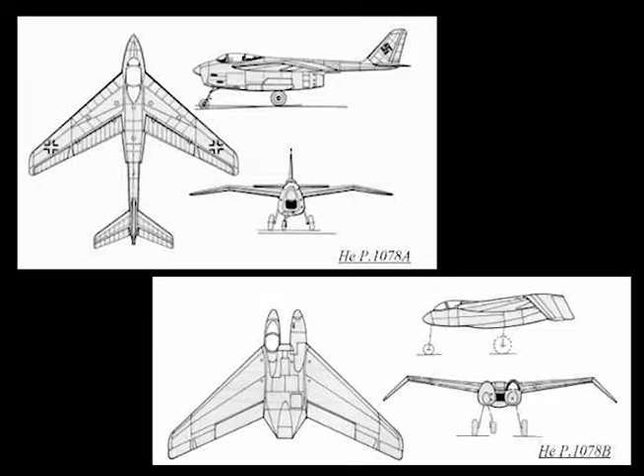Heinkel P-1078 single-jet fighter. Two versions of this single-seat, single-jet fighter are described in Heinkel documents. A third solution was also planned.

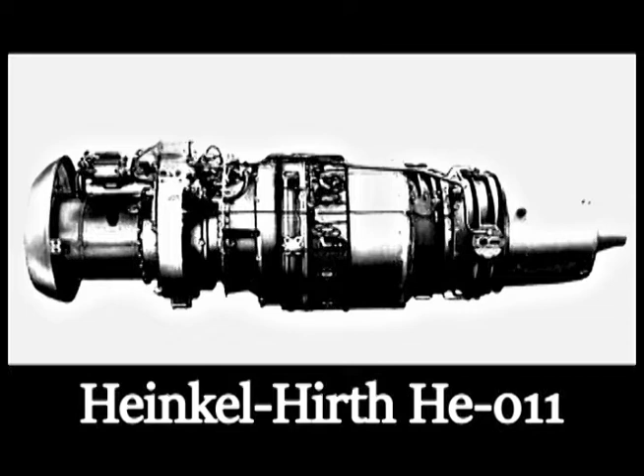The 1078A has a 40 degrees swept-back shoulder, gull wing, and swept-back fin and tailplane. The HES-011 unit is mounted in the lower portion of the fuselage and is connected to the single-jet intake in the nose by a slightly curved duct, 8 feet 10 inches long. Above the intake and well forward in the nose is the pilot's cockpit. There are two Mk-108 guns, one on each side of the cockpit, with provision for automatic triggering.

The main undercarriage wheels retract forward and upward into the fuselage. The nose wheel, which is offset, retracts rearward and upward into the starboard side of the intake duct. There is a large fuel tank extending across the fuselage into each wing root, and a smaller separate tank farther back in the upper portion of the fuselage.

Much less conventional is the 1078B. This is a tailless design with 40 degrees swept-back high wing. There are no vertical control surfaces, but the wingtips have a pronounced anhedral, and controls are provided both on the main wing and the drooping tips.

The fuselage is short and wide, with twin projecting noses. In the port nose is the pilot's cockpit. The starboard nose houses the armament, two Mk-108s, and the retracted offset nose wheel. Automatic triggering is again provided. The main wheels retract forward and upward.

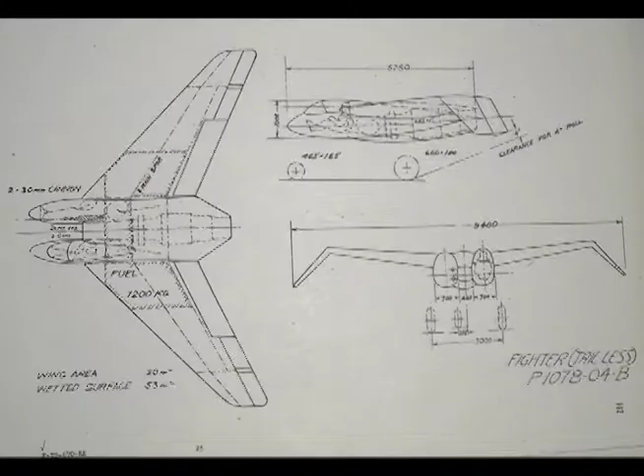Centrally disposed between the projecting noses is the intake for the HES-011 unit, which is mounted in the rear of the fuselage. A single large fuel tank extends across the upper portion of the fuselage into both wing roots.

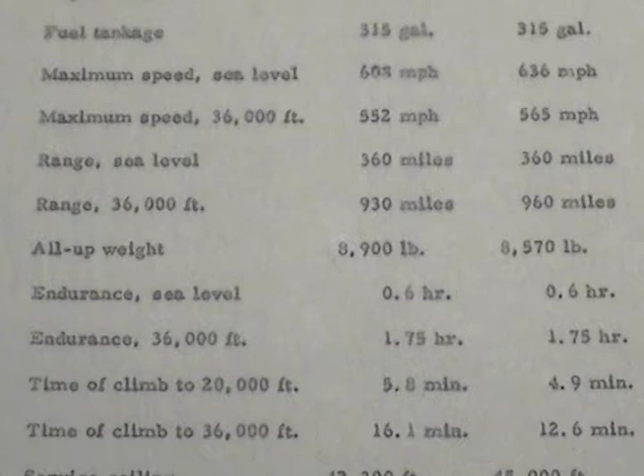Submitted for the single-jet fighter competition is a true tailless type, with a pronounced inverted gull wing, which contains the whole of the fuel supply, 320 gallons. The air intake is in the nose of the fuselage, and is flattened to provide space for the pilot's cockpit above and the retracted nose wheel below.

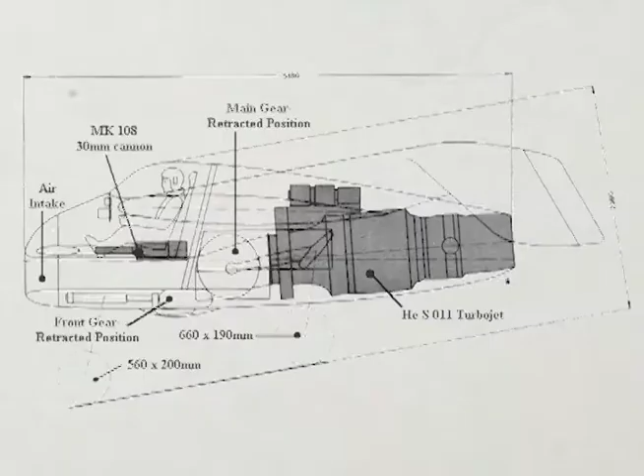Two Mk-108s, 100 rounds per gun, are mounted on each side of the cockpit. The rear of the fuselage is occupied by the HES-011 turbojet unit.

Span 29.54 feet. Wing area 191.6 square feet. Aspect ratio 4.55 to 1.

Takeoff run, 766 yards. Maximum speed, 637 miles per hour at sea level.

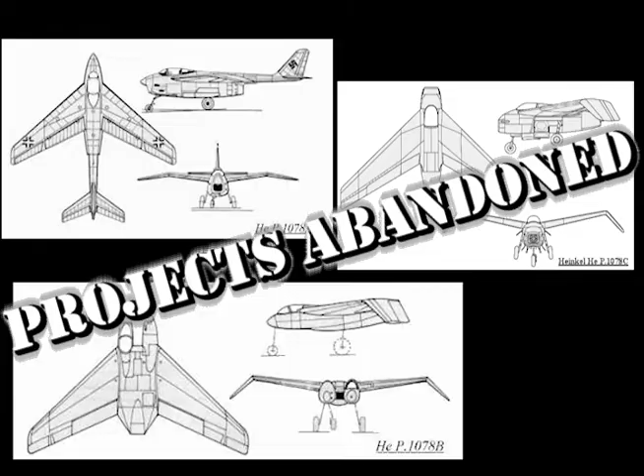Heinkel P-1079 night fighter. This twin-jet two-seat night fighter has the wing swept back 35 degrees at quarter chord and drooping at a small anhedral angle. The conventional vertical fin and tailplane have been replaced by a V-tail.

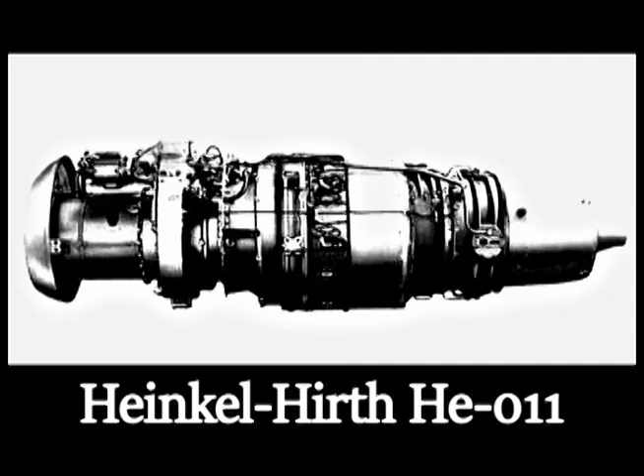The jet units, either two HES-011 or two Jumo-004s, are mounted in the wing roots close to the fuselage, giving a peculiar frontal appearance. Retraction of the main wheels is forward and upward into the fuselage, and the nose wheel retracts rearward and is stowed flat.

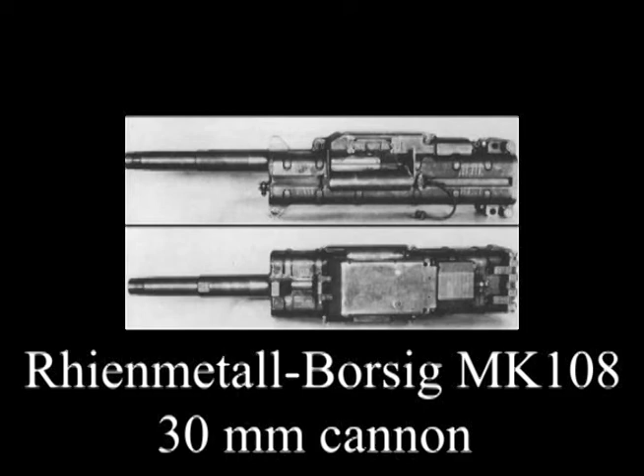The crew sit back to back in a cabin in the nose. 4 Mk-108 guns are mounted in staggered pairs low down on each side of the cabin. There are 3 fuel tanks in the fuselage, and 1 in each wing outboard of the jet unit.

A drawing of this aircraft shows a span of 39.4 feet and a wing area of 323 square feet, whereas a specification sheet gives the span at 45.9 feet and a wing area of 430 square feet. The following weights and performance figures relate to the latter condition.

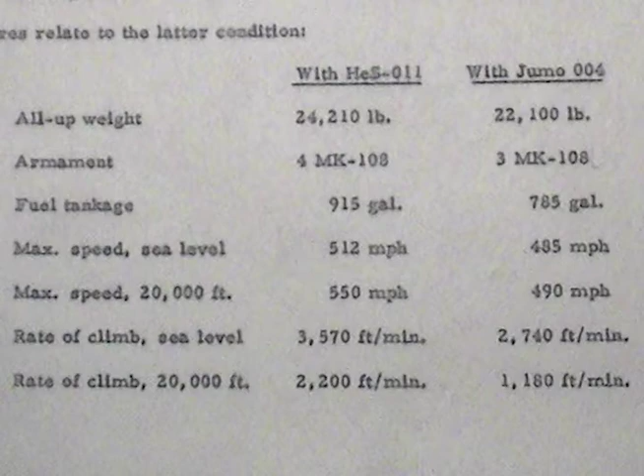There are also other versions of this aircraft designated 1079B. These are both tailless designs. One follows fairly closely on the lines of the aircraft already described, but the rear portion of the fuselage and V-tail have been eliminated and a single fin and rudder substituted.

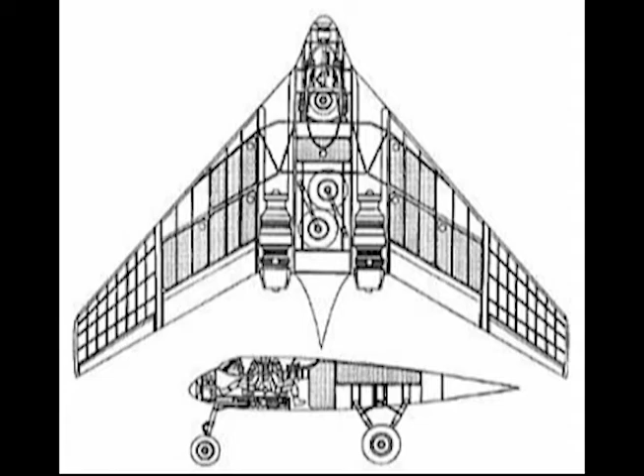The nose has also been shortened and modified to provide staggered seating. The other version of the 1079B approximates more closely a true flying wing design. The vertical fin has been eliminated, and the gull wing has pronounced anhedral on the outer panels.

The jet units are more widely spaced, and the main wheels are stowed flat between them, one retracting upward and forward, and the other upward and rearward.

Heinkel P-1080 Athodyd propelled fighter. This was the latest of the Heinkel projects on which information had been received. It is a single-seat fighter with an athodyd unit in each wing root.

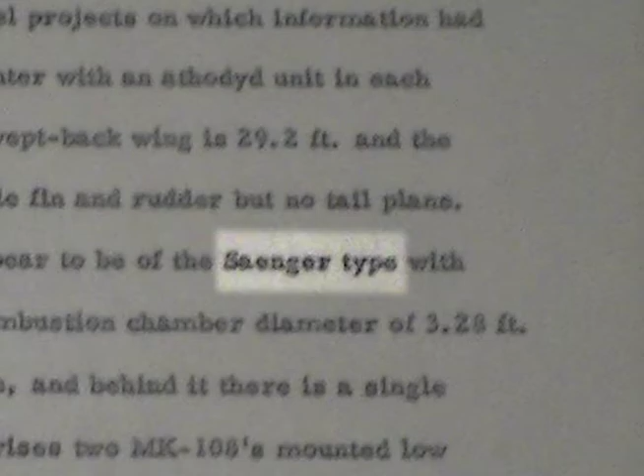The span of the sharply swept-back wing is 29.2 feet, and the wing area is 218 square feet. There is a single fin and rudder, but no tailplane. From a drawing, the athodyd units appear to be of the Saenger type, with an overall length of 16.4 feet, and a combustion chamber diameter of 3.28 feet.

The cockpit is well forward in the nose, and behind it there is a single large fuselage tank. Armament comprises 2 Mk-108s mounted low down, one on each side of the cockpit. The aircraft lands on a retractable skid. No weight or performance estimates are available.

In the last episode, episode 13, I forgot to mention the problems with the impulse duct engines on the HE-162. Apart from the excessive vibration, there was high fuel consumption and limited endurance. And I realized after editing this particular episode that I had completely left out all the drawings that were in the original manuscript. So here's what those look like.

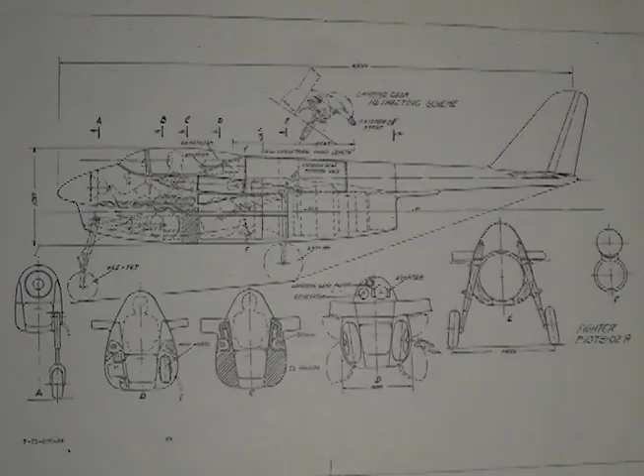The present tense has been used for convenience in the following contexts. However, this does not mean that an aircraft is in existence or that one was ever built.